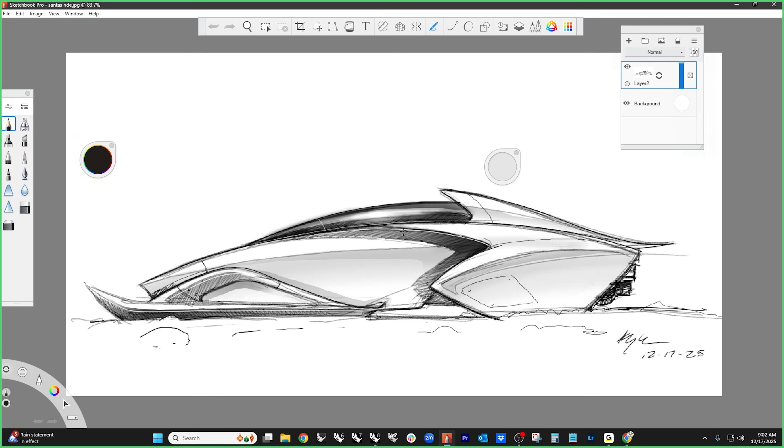The idea behind this is I want to simulate what happens when somebody walks into your desk, throws a sketch down and says build this, and you've never seen it before. You don't have any ideas, you have to figure it out and find the way along the way. So for this thing, I want to talk a little bit about the strategy behind how I would approach something like this. And if my time is limited, which we are on this as well, right?

I'm going to go to SubD because SubD is by far the fastest way to try and pull off some kind of ridiculous form like this.

And if we look at this, break it down into its individual bits, we can look at this form right here and say this has a shape, something like this. It's got a feature line here, which if we were to look at this in side view, I would imagine it would have a shape like this, right? So we can say this is a 3-patch face right here, and this is a 3-patch face right here. Then this transition is either going to be a crease or a 3-edge transition through here, okay? So that shape is actually going to be fairly easy to pull off.

Once we pull that off, you can see that this face right here, and maybe this one too, maybe we'll have to include that one, lines up right in here. So these guys kind of go together. And because this is going to have some kind of arcing section through it like that, we're going to have a face through the middle.

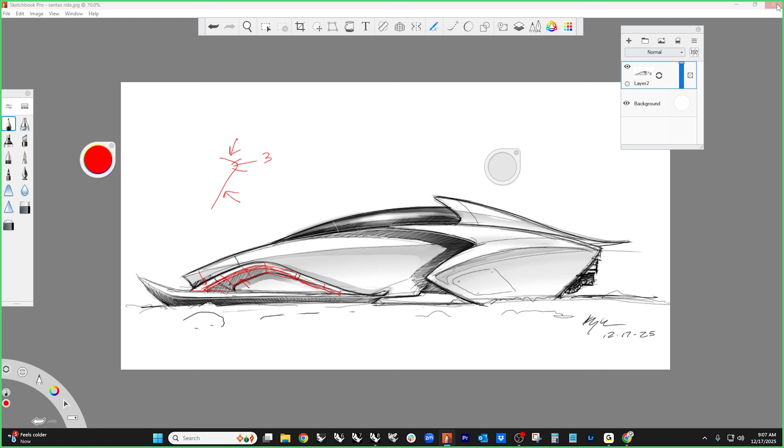And the reason that we need 3 edges is the same reason that we need 3 points to make a curve in CV. I talk about this all the time. If you've seen any of my videos in the past, you know rule of 3. And the idea behind rule of 3, if you haven't seen that video, there is a rule of 3 video on our YouTube. You should watch it.

It takes 3 points to make a corner, right? And if we take this point and we move it out, we take this one and move it out, the corner gets softer. If we move it closer, the corner gets tighter.

And so anytime we have a transition, we're going to make a 3-edge, in SubD, it's going to be a 3-edge or a 3-face transition. This is not how we make corners. We don't do this, right? There's no reason for that when all you need is this.

And so we're going to try and break this down in a way that is as simple as could possibly be. So with that out of the way, and I'm stalling because I'm trying to figure out how to build this. I'm standing here talking about it, so I keep waving my hands thinking, okay, I'll figure this out as I'm going. But that's kind of how this is going to go.

So let's take this image. Let's pick the picture. We're going to go to the materials. We're going to go down here to the object transparency, and we're going to just fade this out a little bit.

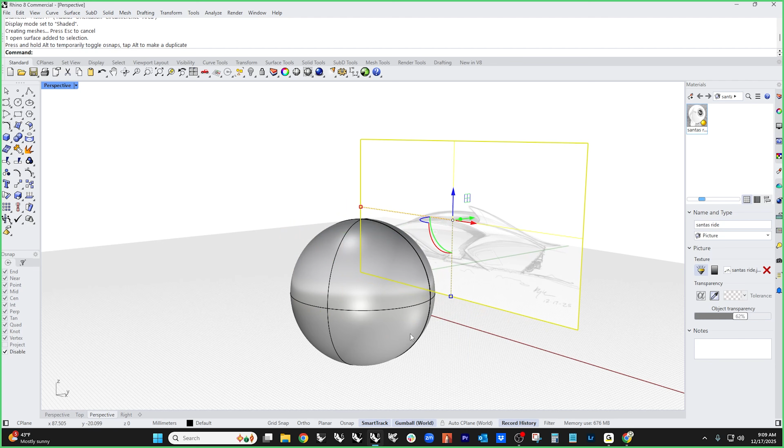The next thing I'm going to do is take this and slide it out of the modeling window. The reason I'm going to do that is if I were to leave this here and then go to shaded mode, it obscures the drawing, and I can't see it. So I like to move it out of the modeling window so I can see what's going on. In this view, it's still kind of targeted to where it is.

Now, because this is going to be a 3D printed thing, let's decide on some type of scale. Everybody always flames me for scale, so let's call this like 250 millimeters, and let's just set a basic scale for this thing, and scale this from here to there. And now we know the basic scale. If I were to throw a dimension on this, we're somewhere in the 250 range, okay?

And for all of those of you who've teased me in the past about using imperial measurements, I'm using millimeters, so don't make fun of me if I have to do math live. I went to art school.

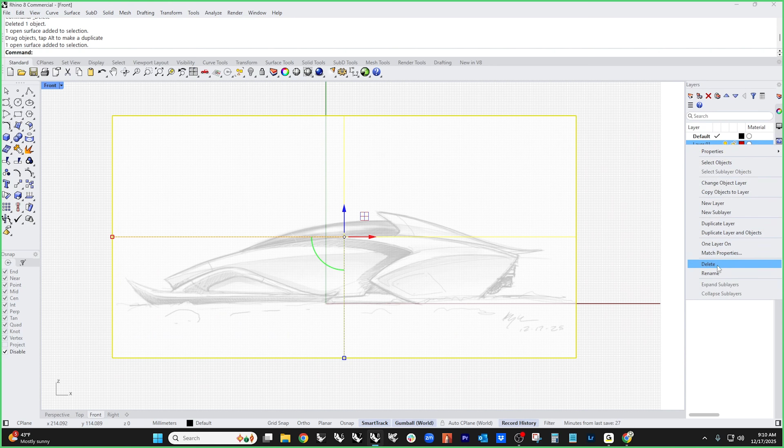Be nice to me. All right, so let's get going on this, and let's lock it. The first thing I'm going to do is go here to the layers. I'm going to assign this to a different layer, and then lock that thing. So now it's in the modeling window, and we don't have to mess with it. Let's tackle the easy stuff to start with, and I feel like the easiest thing to tackle is probably the ski.

So let's start with a curve. I'm going to make this a SubD friendly curve, and I'm going to just draw a shape in here like this. Let's adjust it to match our drawing a little closer. I typically paper doll this stuff, meaning I grab the single face tool. But in this case, I like this ability: once you draw a SubD friendly curve, if you extrude it, you get your face structure for free. So it's a quick thing to do.

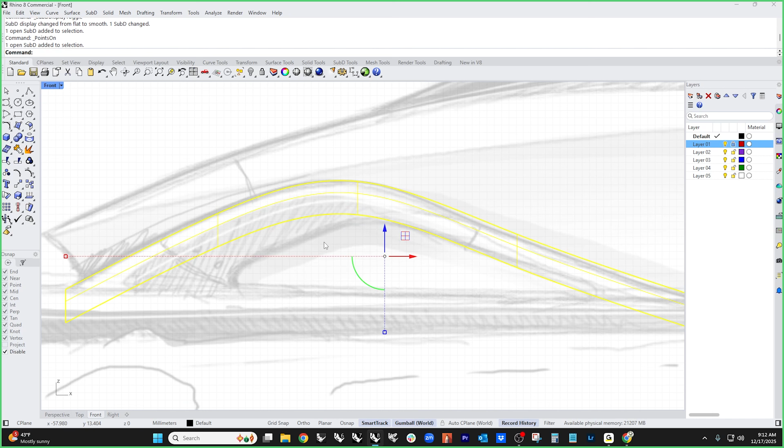So now I can take this edge and extrude this down again. And then if we go to wireframe and box mode, we can start messing with this. Actually, let's do it in smooth mode. Why not? I always say do it in box mode, but let's try it in smooth mode and see what happens. That's interesting. We'll go to box mode. We'll do it that way.

So let's just pull this over here. Pull that up a little bit. Pull this in a little bit. I'm Control-Shift dragging to get those points selected. And if we switch back to smooth mode, we should have our basic shape. And we do. Now, I've got my bone line here, right? This is where my transition is, but I don't actually have a transition yet.

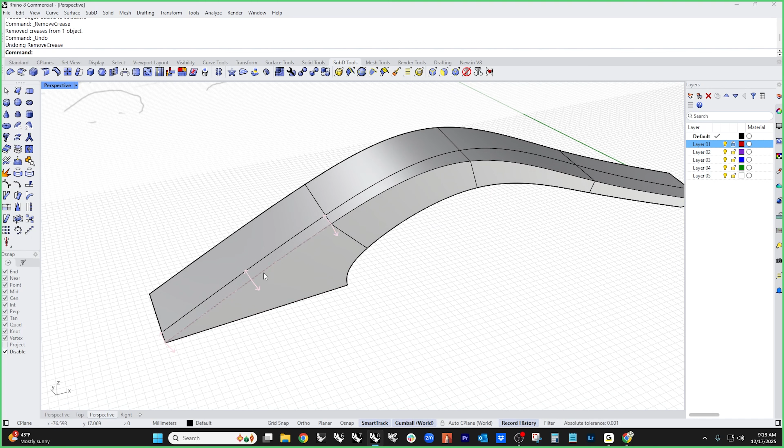If I were to grab this, you can see that the transition is going to be too soft. Or it's too sharp, actually. At this point, it's a crease. If we remove this crease, now it's going to get too soft. So in order to tighten that up, I'm going to just bevel this crease. I'm going to do that in box mode because it's easier to control. We're going to just add a little bevel in here, like that.

And now I'm going to remove my creases. Now we've got a little bit better of a shape. I didn't want to pull it over quite that far. Maybe we grab this one. We can mess with that transition a little bit. And then I want to crease that point.

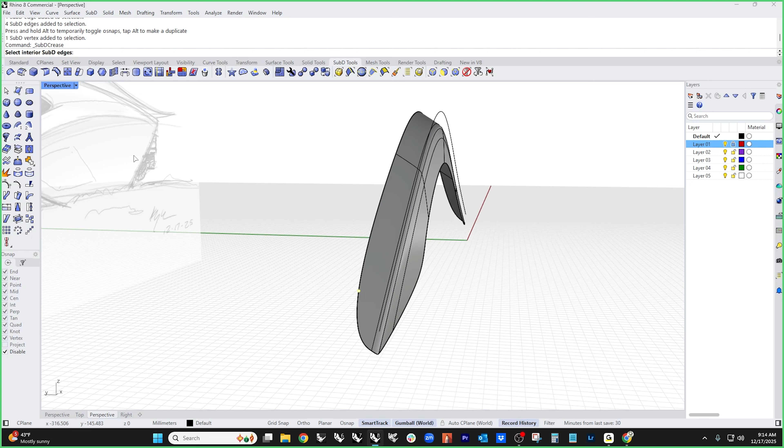Okay. Here we go. I'm probably going to crease these two points as well. Somewhere in there. There you are. And that gives me my ski shape. Okay. So let's finish that off, and let's just grab this edge right here and this edge.

Let's just extrude that out one. And then let's grab this edge. Actually, we can just do this whole thing. Deselect those.

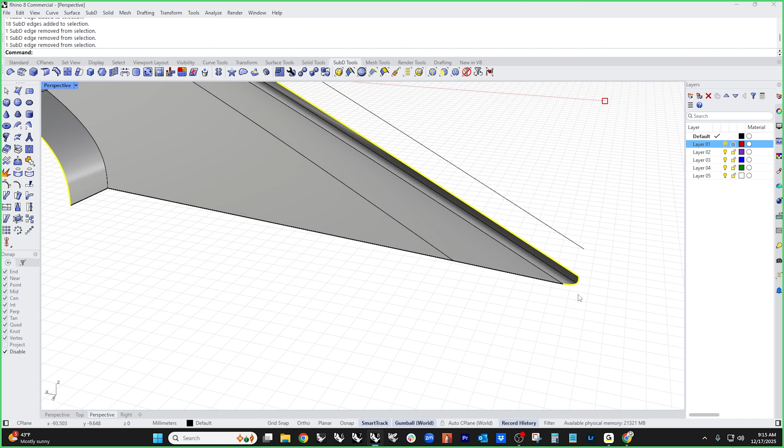And let's bridge those. Or not. 1, 2, 3, 4. There we go. Bridge has to have matching edges. And bridge is also fussy about the picks, so we have to follow the directions pretty closely.

So we're going to set the first edge. Now this is going to be the second edge. And that'll bridge that together. And as far as segments go, I'm pretty okay with just one on there.

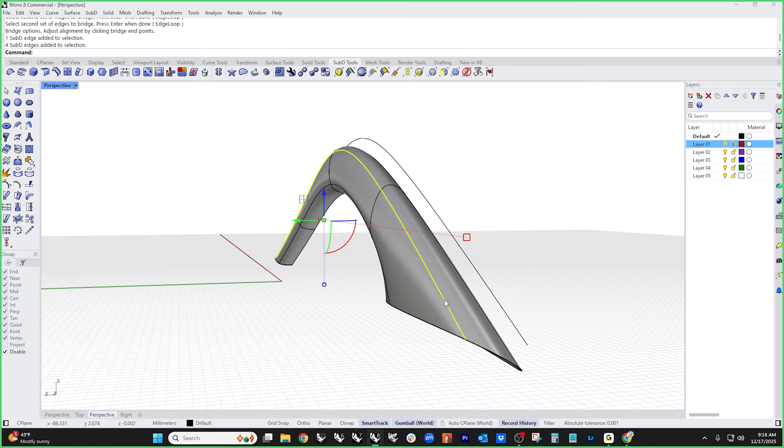And then let's add a bevel to this. And we're just going to add our little 3-edge set there. And we'll add a little 3-edge set here. And then that's going to give us the sharpness we need on those corners. All right, probably bevel that edge as well.

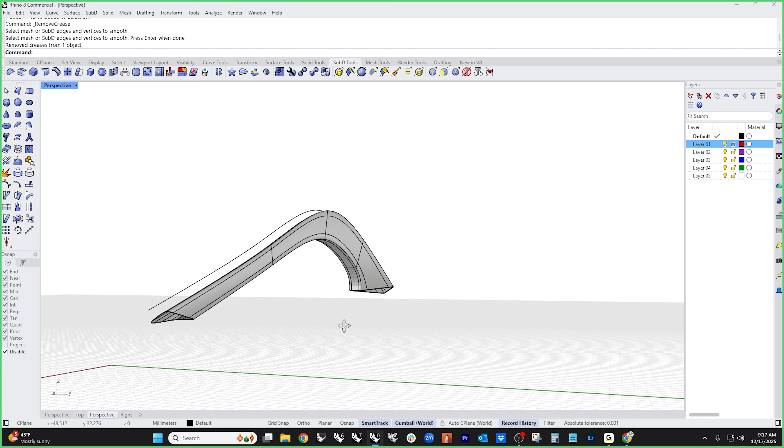And then we should be able to get rid of all of our creases. I like using bevels over creases because they're a little bit easier to control. And that gives us the ability to adjust this edge as finely as we want to do it. So, all right, there's our first part of our ski.

Let's do the second part of the ski. We'll do the same thing down here. SubD friendly curve. Like that. And I'm just going to extrude those faces down. Go to box mode. Go to wireframe so I can see my sketch.

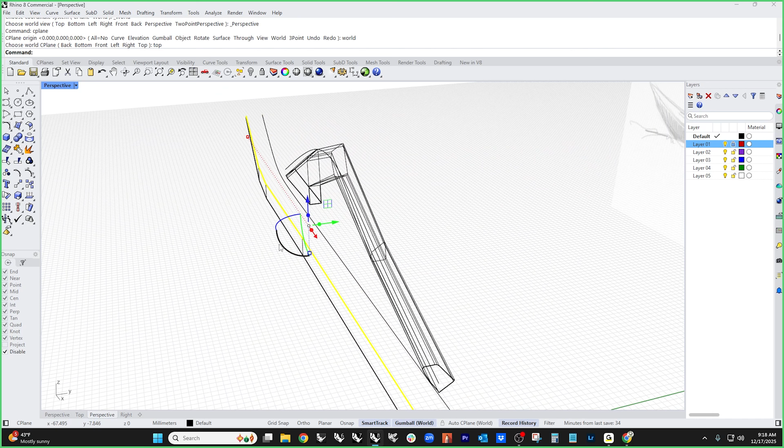And I'm just going to tighten this up a little bit. Tighten that up a little bit. Let's move this out, kind of like that. And then the ski has a second part up here that kind of transitions in. It's just 1, 2, 3, right? We're just 1, 2, 3ing our way to where we need to be.

And so let's pull this in a little bit like that. And at this point, if we were to look at this, this is our 1, 2, 3. So if we go to smooth mode, it's got creases. Let's get rid of the creases. If we go to smooth mode without creases, you can see that that's a very, very soft transition.

So what we need to do is this needs to be 1, this needs to be 1, but this edge actually needs to be 3 in order to get this effect. So right now what we have is this. Very soft, right? 1, 2, 3. What we need is this. Right? So we need a 1, 2, 3 right there.

So what we're going to do is bevel this edge. And we're going to bevel it just a little bit. Now, people get bent out of shape because bevel does some wonky things sometimes. Just get the bevel in, because you can always pick an edge and slide it and adjust this later.

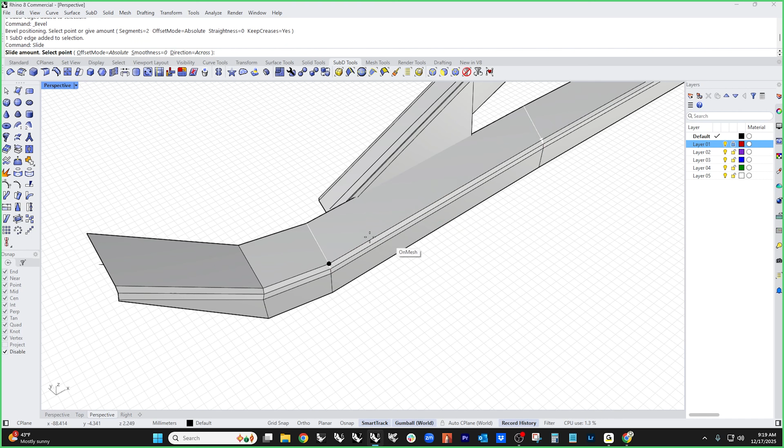So don't get too worked up over whether or not bevel is doing anything. Sometimes bevel gets a little wild on you. Don't let that throw you. Just keep cruising and then adjust the edges and stuff later.

I'm going to cheat, and let's just mirror this, and then we're going to join these two and we're going to make them smooth. And that gives us this. And let's move this guy over, something like that. Maybe this edge down here needs to pull down a little farther, so I'm just going to extrude another set. And then that all intersects there.

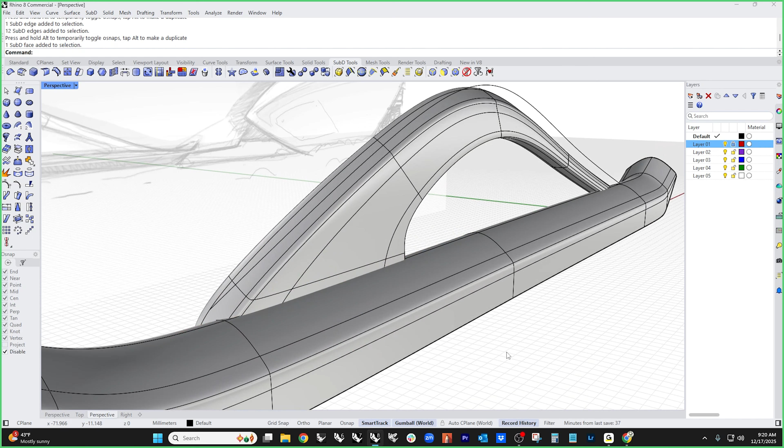Now, we could spend the time to bridge these two together and have really smooth transitions. But like I said, we're going to move fast and kind of smash stuff. So I'm not super concerned about whether this stuff is intersecting. It just needs to be overlapping, right? So this is overlapping completely and that's overlapping completely, because when we run Shrinkwrap on this, Shrinkwrap is going to do the unification for us. So let's bridge these guys together.

And one of the little subtleties of bridge is if you pick edges that do match, you can pre-select them and run bridge. If they don't match, then that's when bridge starts misbehaving and fussing at you.

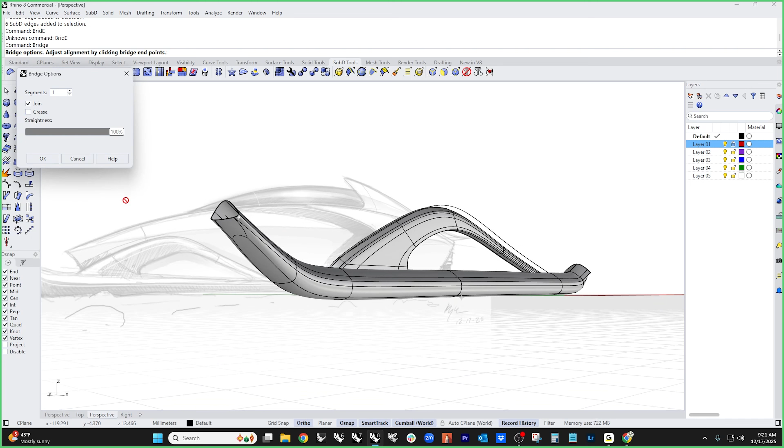So we can crease it and make it sharp on the bottom. I'm probably not going to worry about that. I'm going to leave it. Actually, maybe. We'll leave it like that. We'll leave it soft. And then we can always bevel this edge.

I don't like this topology down here, so I'm going to actually just stitch those two using the stitch command. That gives me an edge down here so that if I were to bevel this, it's going to go more in the direction that I wanted. And like I said, bevel gets a little wild sometimes, so don't worry a lot about it. You can always go back and adjust later. I just get the edges in there and then you can adjust them later.

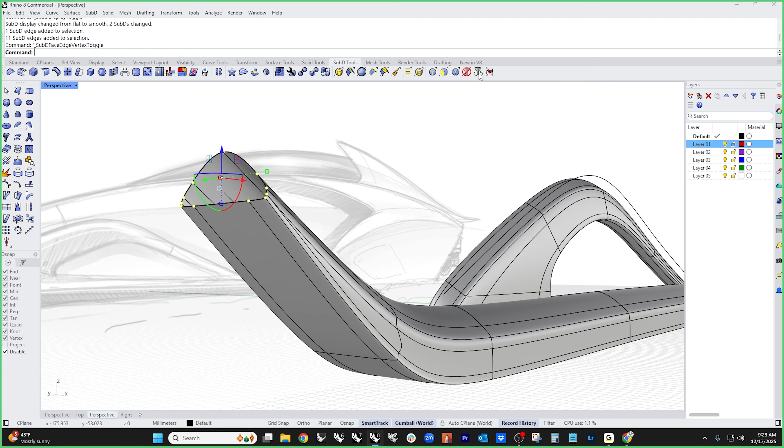And so now if we go to smooth mode, that gives us this. And then let's grab this entire edge. Let's see what happens. Let's use the filter to toggle this to points, and then let's stitch that and just see what it looks like. I'm okay with that, because we can always grab this edge, slide it a little bit. That gives us a nice little point. Again, we're kind of moving fast here, so I'm not gonna spend a lot of time sweating this stuff. I'm just gonna kind of keep pushing forward.

Now, it looks like our transition here is a little sharper than what I have, so I'm going to actually add an edge right there and let that transition happen a little softer. And then let's look at the shape of this and decide if we like it. And in this case, I kind of don't. I kind of want this to be a little cooler shape. So let's play with it now. Maybe we pull this in and give it a little bit more interesting profile like that.

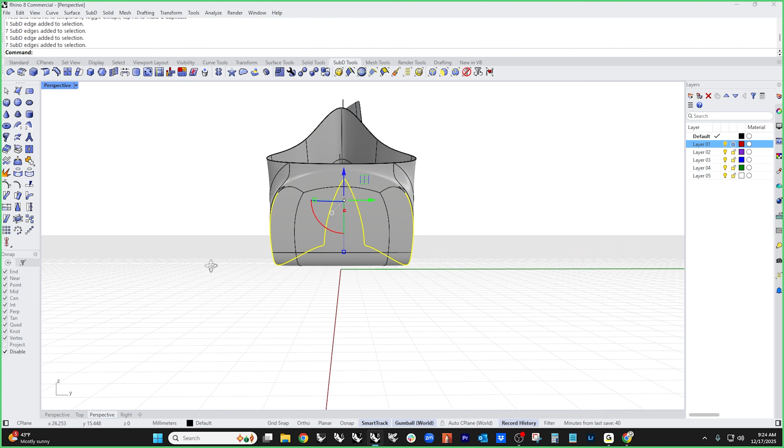And then maybe even this edge and this edge come in. Got a little weird topology back here. We'll deal with that. Maybe we pull this in just a hair. And then maybe even this one could be a little bit more interesting. Maybe just these center sections. This is the beauty of SubD. It's playful. You can come in and start playing with things and get very interesting shapes, and start kind of having some fun with it.

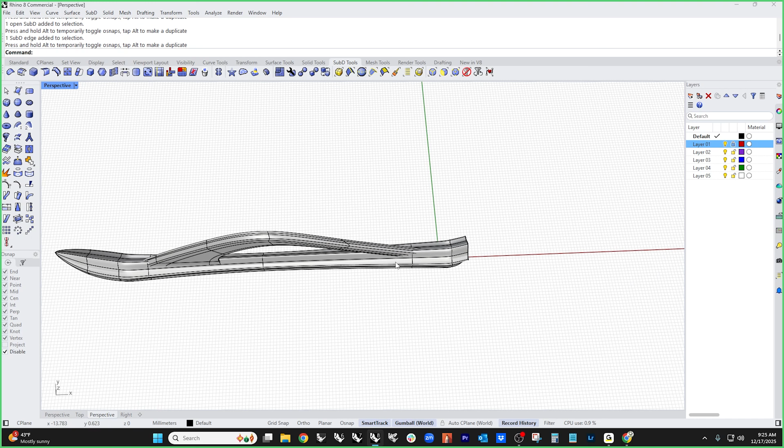Add a little bit of shape to that, and then skis are not typically dead flat end to end unless you grew up in the 70s like I did. So let's add a little shape to it like that. And then I don't like the relationship between these two anymore, so I'm going to move this over just a little bit. And this one, I don't like how that's coming together, so let's pull that back a little bit. Like that.

Now, like I said, there's a couple of options as far as the transition between this piece and this piece. We could actually go through and do the topology in order to be able to connect these all up so it's a beautiful, sweet transition. I'm not going to do that for this. What we're going to do is simply just shrink wrap over this. The other option is if we went to NURBS, you could do what I refer to as a pipe trim, which is you trim a gap out of this one, trim a gap out of that one, and then use blend surf in between the two. I do that all the time when I don't want to mess with the topology on SubD.

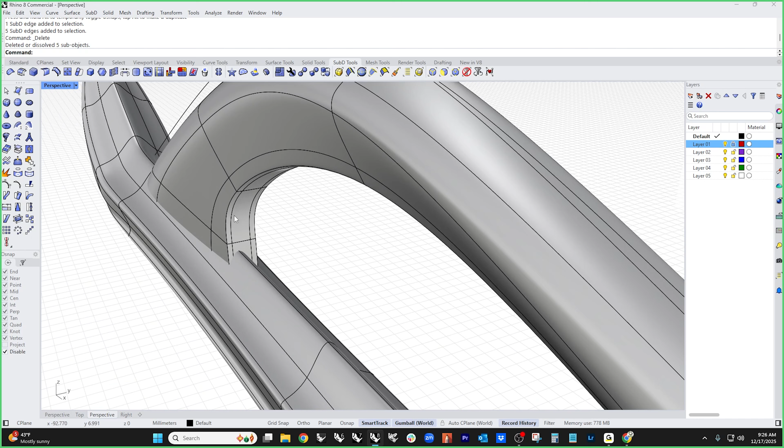I will grab the blend surf tool and just blend surf this stuff together. And that's a super easy way to handle that. Now I'm messing with the topology a little bit. This transition was a little sharp, so I didn't really like that. This transition is a little sharp. I don't like that. So I'm going to soften that up just a little bit just by getting rid of the center of that. And this one actually is a little sharp, so I'm going to get rid of that one. And that softens that up a little bit, makes it a little bit more elegant.

Let's slide these guys in a little bit. I feel like I want to roll that highlight off of this edge just a hair more. So let's pull that out.

Spent the first part of the video talking about how we're going to move fast and not really worry about stuff, and then here I am doodling. So, yeah, what are you going to do?

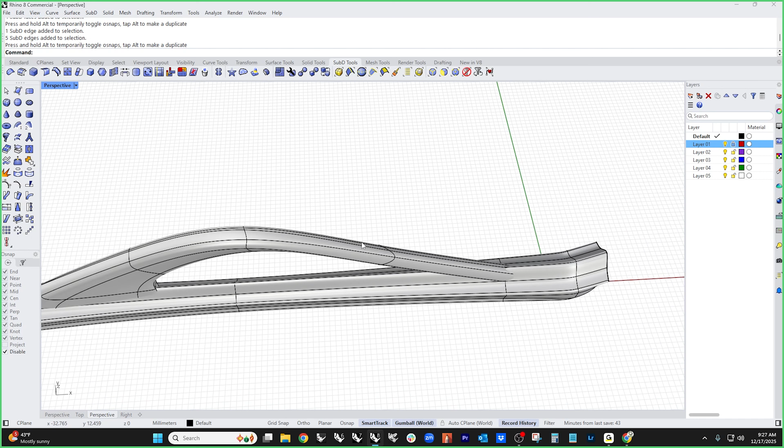I'm going to take this end of this thing. I want to skinny it just a little bit so that there's a little bit more thick-thin going on there, and then I'm going to fatten this end just a little bit. I like that kind of teardrop thing that's going on there a little bit better. Maybe this edge got a little fat on me. That feels a little nicer.

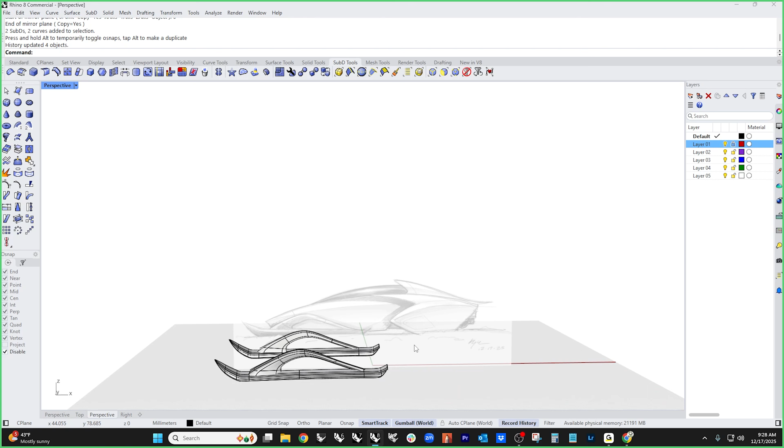All right, so let's call that skis. I'm going to group those for the time being, and let's move this out to where we think our track should be, something like that. And then I'm going to mirror. And that's our setup. Now, we may need to mess with that. We might need to move this out a little bit farther. But that's the basics of that. Okay, so now we got skis. And the back of this is ugly. Let's fix those. Let's grab this.

And I'm going to use the filter to change that to points, and then I'm just going to stitch. Now, the topology on this is not something that I'm terribly proud of. So let's mess with this a little bit and see if we can take some of the awful out of this. Let's take these guys and these guys. Let's stitch those together. I basically wanted this just to come to a singularity at the back. Stitch that up.

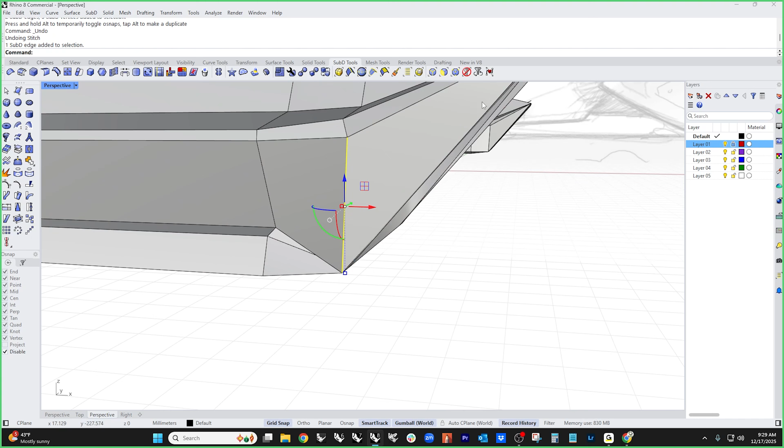And that edge, let's get those points on, shut that one off. Good enough for shrink wrap. That'll work. Still some mank in here that's not amazing. You know, this edge could probably go away, and this edge could probably go away. But for what we're doing, it's going to work just fine.

Okay, so let's look at the next biggest part of this thing, like the main body form. I'm going to stick these on a layer and change object layer, and I'm going to lock them. And I'm going to not make them purple because I don't like all the candy colors. And then that way we can hide these things if we need to. So let's hide them for the time being. And then let's look at the layout of the body.

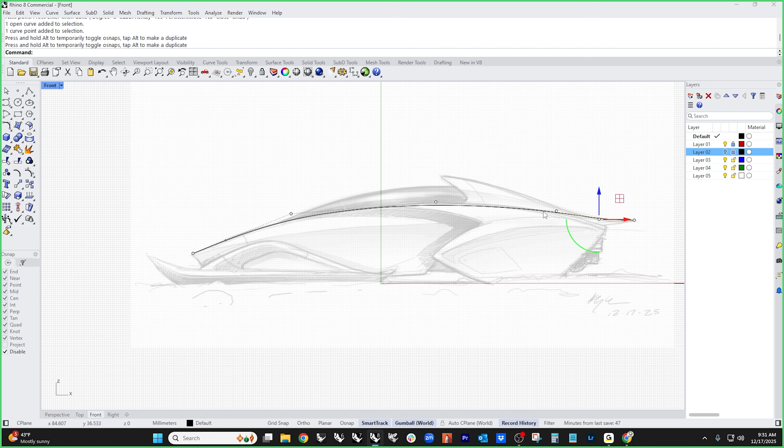Now, the main form on this I'm going to start with is kind of the profile shape here. So let's go ahead and draw that. Again, SubD friendly curve. And we're going to just draw our shape. Looks like I've got grid snap on. And then it's got a little ducktail in the back, so that little transition back there. And that's good enough. So let's just extrude this down. That's going to give us a row of points.

Go to box mode and start getting what we need here. Filter on or something. Interesting. I just updated Rhino right before this video, and I'm wondering if somebody messed with something on the selector. It's behaving a little weird. All right, so that gives us this first little strip right here.

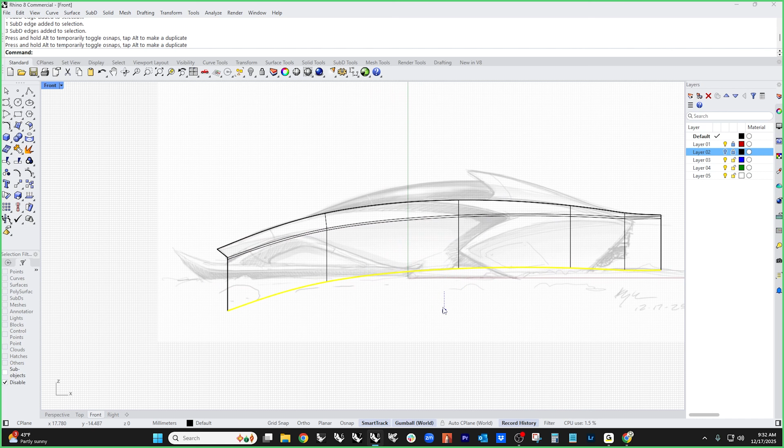We need another set of edges here, so I'm going to just extrude down one, and then I'm going to extrude down again, and then I'm just going to scale to 0 to flatten these guys out, and then we'll pull this up. And so now we can just grab this guy. I'm going to relocate gumball to here. I'm going to rotate gumball to there, and then I'm going to scale this edge flat. Relocate gumball there.

And then scale this a little bit. And that gives us kind of our front end. And maybe we'll tuck these in a little bit just to give it a little shark mouth. And then the back of this, actually these edges right here come way up like that. And this edge is going to come way forward like that.

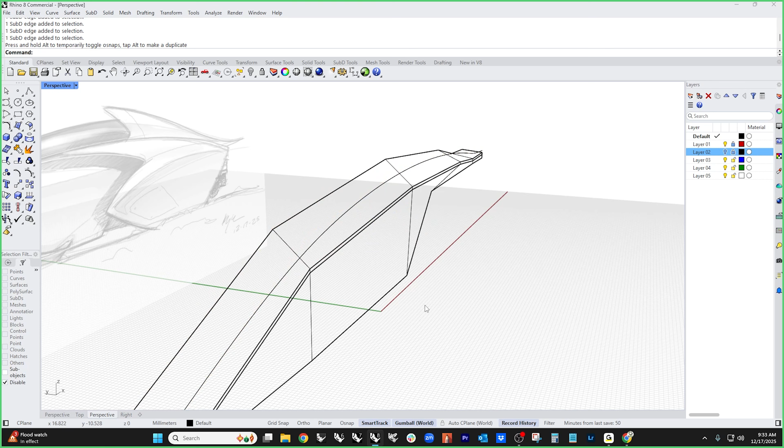And then this top edge is going to break over to start creating our shape like that. And then this bottom edge is also going to break over to get our kind of tuck under. Now, if we go to smooth mode, we should have something that looks like this, and we're going to get rid of these creases. And that should give us something that looks like that.

Now, we can start picking edges and slide them to get a little softer result. See how that, remember, this looks familiar, right? We're moving points farther apart and they get softer. We move them closer together and they get tighter, right? So if I grab this point and I slide it, see how that sharpens up? If I move it away, it softens.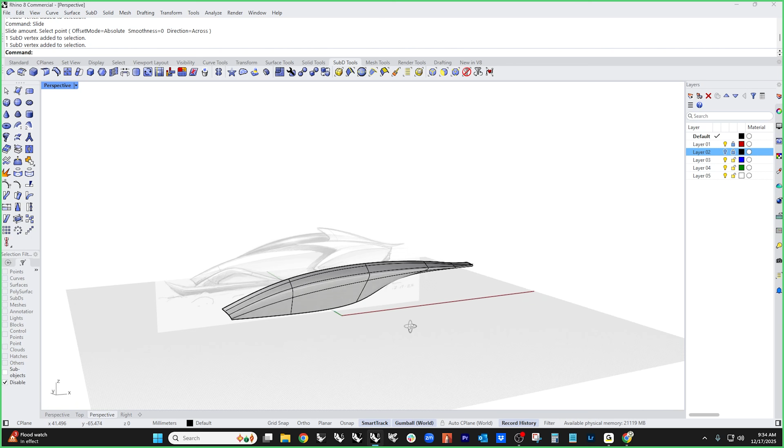It's just threes. 1, 2, 3. That's what's making this up. 1, 2, 3 is what's making up this part of the transition. 1, 2, 3 is what's making up that part of the transition. Once you understand that 1, 2, 3 thing with SubD, all of the mystery falls away.

All right, so let's mess with the shape of this now, and we can do that by just adjusting this, right? And I'm going to hide this curve. Actually, I'm going to delete it because we don't need it anymore. And then if I mirror this by here, and then we take these two things and we join them smooth, we get the basic body of our

vehicle. And we can crease these points down here to get that little sharp edge right there. And maybe we want to pull these 2 points out. Starting to look kind of interesting now, right?

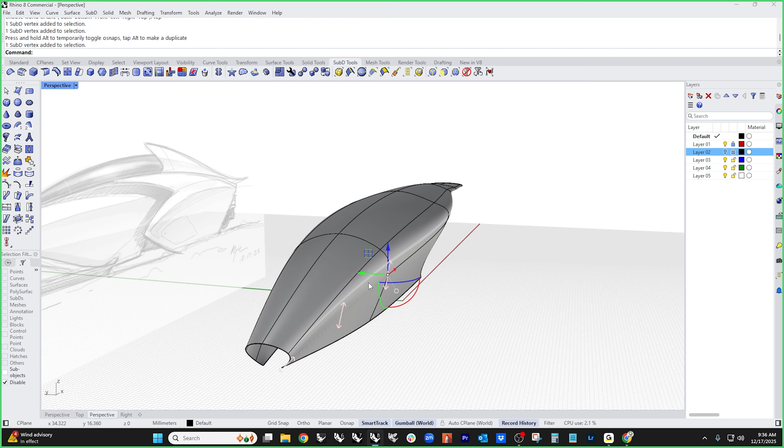Kind of like a speed carp. That was a big insult when I was in car school. It's good, looks like a fish, like a speed carp. And fight.

All right, so let's get this back where it needs to be. And that's kind of feeling... I'm going to slide this point back down a little bit. I want that highlight to tighten up a little bit.

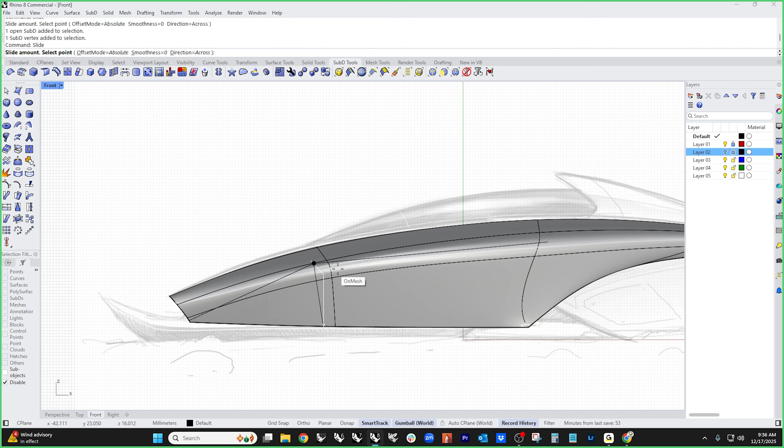And I'm only messing with one side of this. I could have this set to some kind of symmetry, but I'm not going to worry a ton about it. I can always go back and do it again. So I like this side, I don't like the other side.

So let's just blow it away and we'll just mirror again. There is a symmetry command in SubD, and everybody's like, how come you don't use the symmetry command? I'm like, A, because I'm lazy. And B, I do actually kind of like to experiment with the form and see what works. So let's close this off.

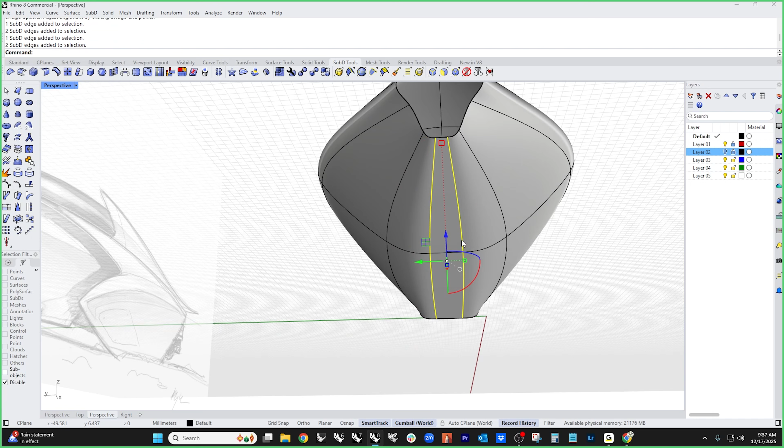And let's bridge this. And I'm going to add a couple more segments in here, maybe like that. And then what that'll do is gives me the ability to adjust the shape on the bottom of this thing, how tight that transition is. Like maybe we add some kind of crazy ground effect thing going on there.

Not necessarily indicated in the sketch, but I tend to, especially when I'm modeling my own stuff, take the sketch as just a suggestion and then figure out what I really want the thing to look like in 3D. Because you can't lie in 3D, right? You can lie, cheat, and steal on a sketch. That's like, anybody can do that.

You know, I see people generating stuff with AI all the time, and I'm actually pro AI. That's a controversial thing, but there is a lot of lying, cheating, and stealing going on there, where once you get over the novelty of the thing, there is some practicality that has to happen at some point where you say, okay, well, now this thing actually has to be a real thing. And that's where getting something into 3D really makes a big difference.

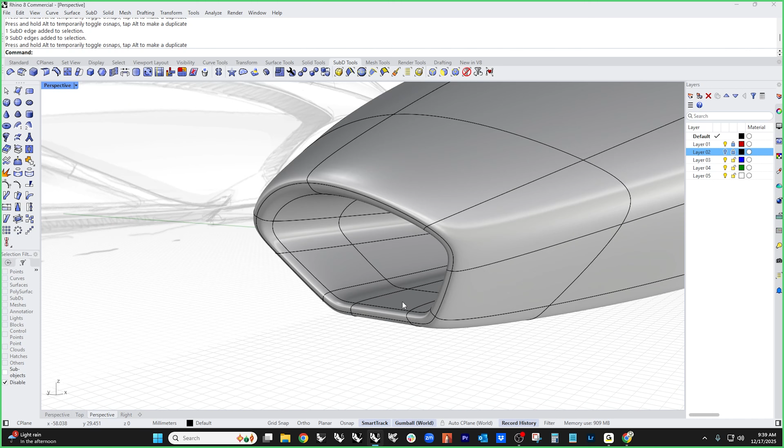So while I was talking, what I did was I selected this edge and I just started scaling, held down Shift, held down the Control key, and that extrudes in another ring of faces. And as I do that, now I can use the extruder on the gumball and just model that intake in. And then just for sight lines and stuff, it probably makes sense to just take this and tuck it up like that, so when you look in there, you don't see the opening.

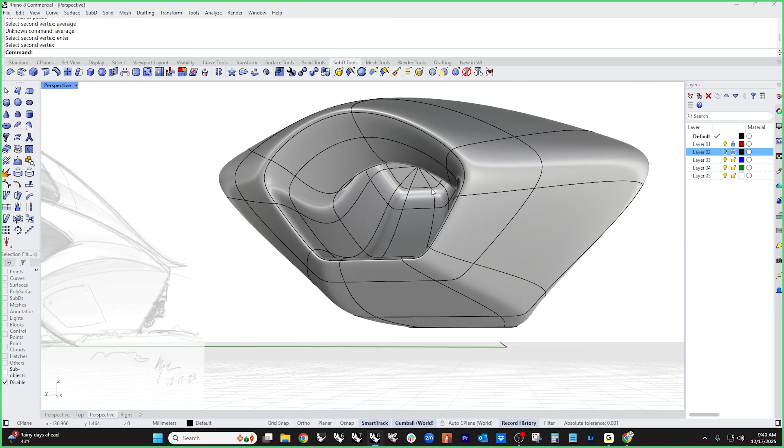And I would probably even take this, because of what we're going to do with it later, I'd probably just take that and stitch it into a singularity and leave it alone so that it's closed. And I may need to add one more edge in there so that it doesn't get a little weird. Or I can even do what I did before, which is to select this, start scaling, hold down Shift, hold down Control, and scale in a cap, and then turn that to points, and then stitch that. And that makes a little cleaner thing like that. So this is now closed up in the front.

And then let's bridge the back of this together. And I probably will use the same settings I did before, that way everything lines up. And then I can stitch these two, and I can stitch these two. And then that way the topology all flows the way that it's supposed to flow.

And then I can always go back if I want to start adding details. I can say, well, does this have a little secondary canard or something like that on the bottom that makes something interesting, which that's kind of cool. I don't hate that. Let's play with that a little bit and see what we get. That's kind of a fun little highlight.

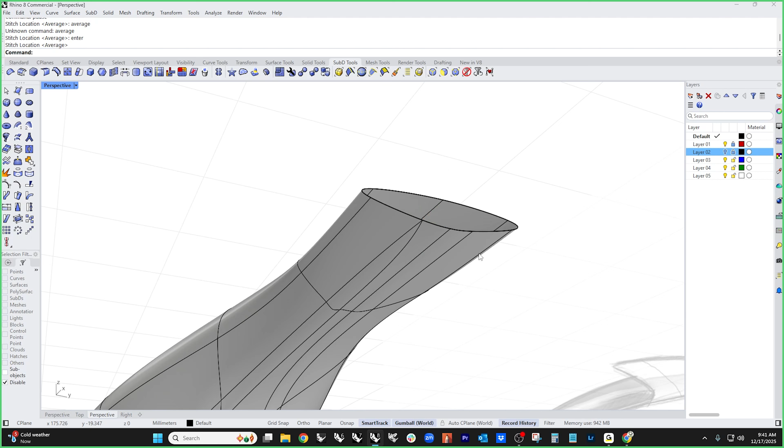So this guy's closed up, and then back here we have a decision to make about how we want to close this thing up, because we don't have the same number of edges. I've got 2 edges up here, and 1, 2, 3, 4, 5 down here. I need to figure out how to combine this stuff. So if I take these two and stitch them into a triangle, and these two into a triangle, now I've got 1, 2, 3 edges. Still isn't going to work.

So what if I take these two and stitch those into a triangle? Now I can bridge between those two, and it ends up working.

Now, the edge of this ended up failing because we've got some stuff going on here. So I'm just going to stitch that corner and that corner, and then go back and crease those to get my sharpness back, and then take this and tuck it up a little bit so it gives me the shape I'm looking for.

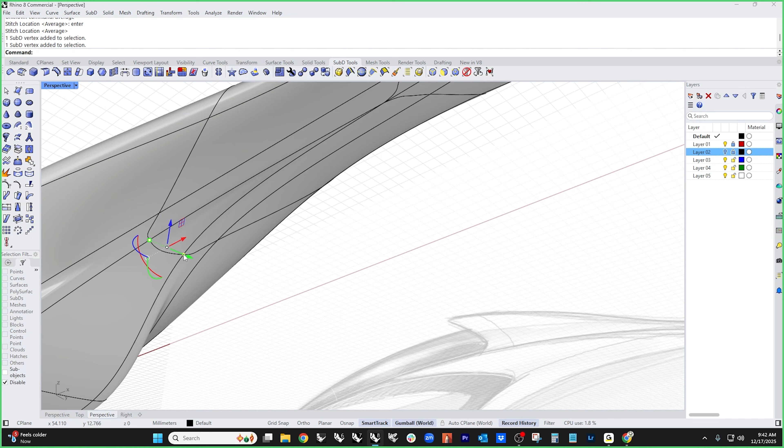We may even want to start combining these a little farther down, like maybe these two stitch, and that way the topology fights itself a little less. Maybe we stitch these earlier and let that do something like that. Yeah, it'll work, that's fine. We could mess with this a little more, but I'm not gonna. It's kind of doing what we want it to do.

Let's do something here as far as evaluation is concerned. Let's throw the automotive environment in here because it's got a really nice horizon line on it. I'm just grabbing that from the Rhino environment library. And then if we go into rendered mode, we should probably make it red because it's our Santa.

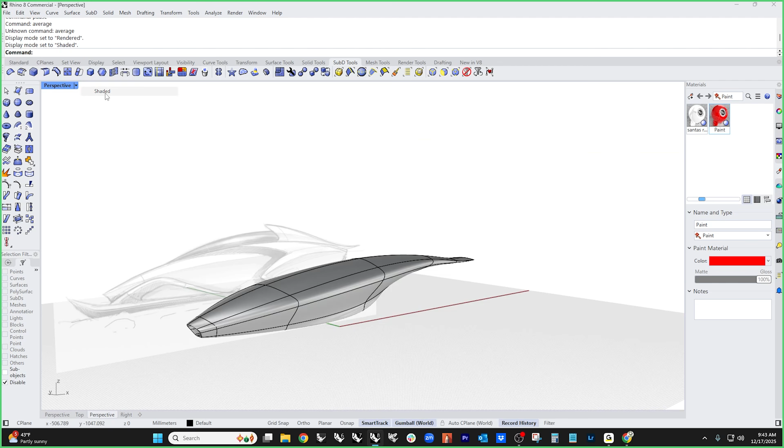So now we can start checking highlights and start with the oohing and the aahing, saying okay, well, that's doing what I want it to do, right? Okay, how we doing? Need to pick up the pace a little.

All right, so let's bring our skis back. I may have been a tad ambitious with this build. And it looks like our model is actually not at 0. So let's fix that.

And then the skis kind of need to attach to the sled somehow. So I'm gonna unlock that, grab a face here, and extrude, and then grab. Somebody has messed with the selector.

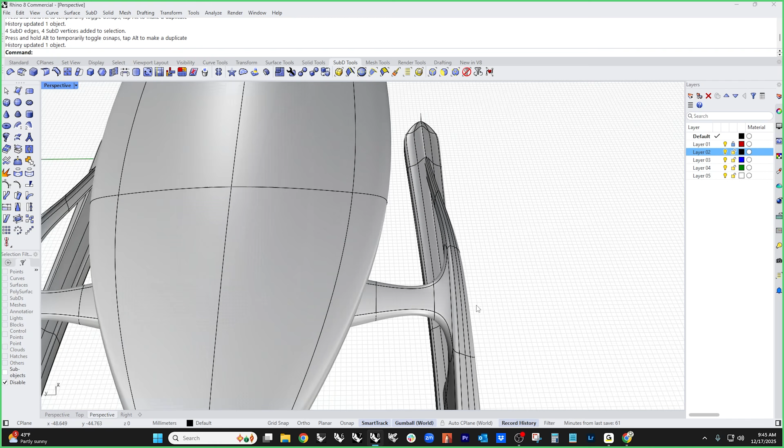And I'm going to just draw some kind of fantastical suspension component in here, and we'll call that something interesting and just leave it be. That'll be enough. Maybe we play with the shape on this. Does it look cooler like that? Does it look cooler like that? I kind of tend to like something like that. Looks a little swoopier. So let's call that good.

Now we've got this form on the back. It's kind of an interesting one because it integrates in with the body. And again, because of how we're going to handle this at the end—and it looks like I lost my corner here—because of how it integrates with the body, I'm not going to worry too much about any of this. So let's hide this for now.

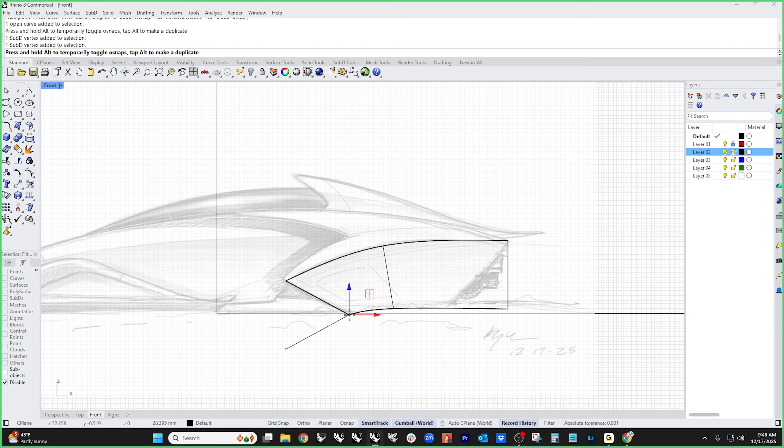Let's go back to our curve drawing technique. And this one we're going to do really simple. This is just going to be a 3-face thing. And we might need one edge in the middle just because this needs some shape. So let's do that. I'm going to insert an edge in the middle, and then we'll just add some shape to that.

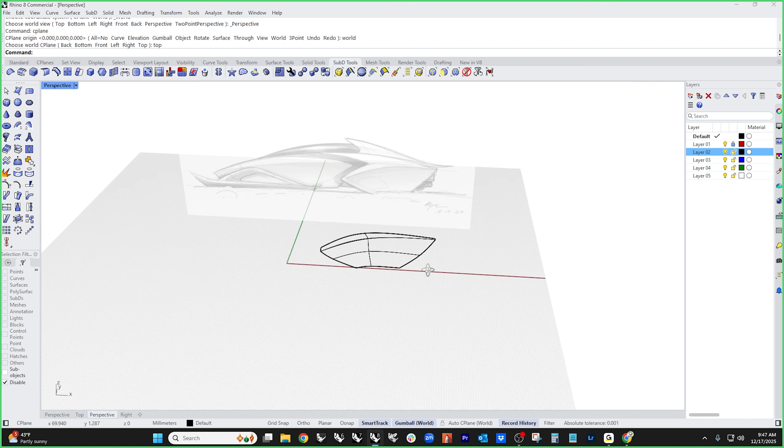And then this edge up here, we're just going to extrude that straight up. Control Shift Drag is how I'm getting the additional—how I'm selecting the sub objects of this thing, if you're like, how in the world? And so we've got a flat piece now, right?

This is what I refer to as a paper doll. And if I pull this over, that's that transition. And if I pull this over, that's that transition. And this is creased right now, which I don't want, so I'm going to uncrease it, but I am going to bevel it. Bevels are a lot easier to do in box mode, by the way. And so that gives me that transition.

And then I can mess with this transition. Come now, I'm going to have words with the developers—they've messed with my selector.

So that gives us that shape. And then this edge right here controls how much bend or flex this thing has. And then this edge controls how sharp that highlight is.

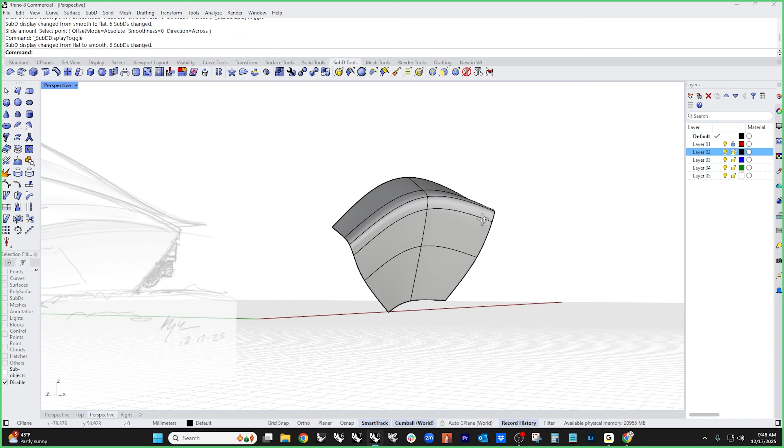So if I bring this up tight, that highlight sharpens up quite a bit. And I think that's kind of what I'm looking for. I may get rid of that one just to soften that a little bit. I like that better.

Now if we count, I've got 1, 2 edges here. If I consider that this is the side of my box and this is the top of my box, then I have to get 2 faces over here in order to get this guy to turn the corner. So if I go 1, 2, and then I go to box mode and I stitch that together and stitch this together and get rid of this crease.

Then same thing over here. 1, see that? That lines up. 2, and then I stitch these 2. I have a hotkey set up for stitch, by the way, that's why I'm not hitting the command. I highly recommend you set one up for yourself because you will be using it a lot.

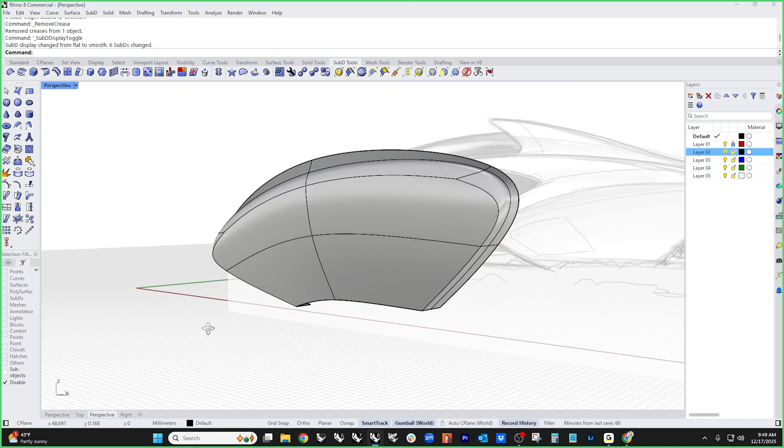So now that gives us this kind of shape. And this edge here probably needs a soft crease because we've lost our sharpness here. So let's throw a soft crease on this. Let's do a constant weight of like 60, and that will give us our sharpness back.

And let's do 70 on this one. That gives us the ability to take this edge and put it right back where we wanted it, and maintain the sharpness of that form without it being laser sharp. There is a crease on that which I want to get rid of, and there's a crease on that which I want to get rid of. That'll soften that thing up a little bit.

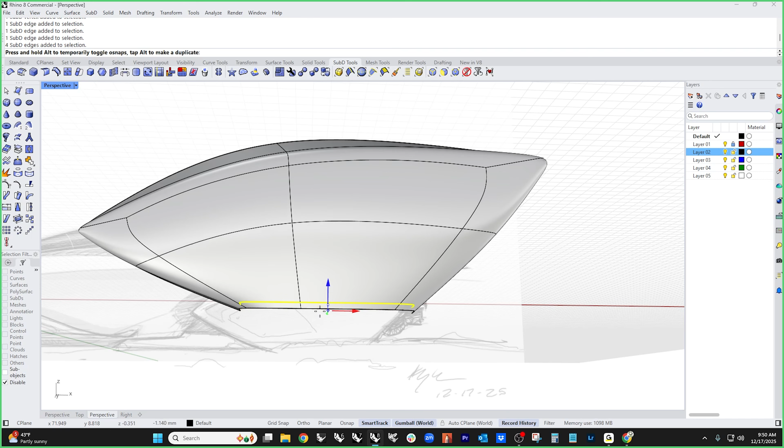So that gives us our little pod, right? And we can say that maybe this is like some sort of ski, skid, skiff, whatever thing. So maybe this is supposed to have a flat bottom. Anytime you're designing anything, even a fantasy thing for some kind of supposed purpose, you should think about what the thing is and whether it makes sense.

Like, does it have the basic feasibility of the machine you're designing? So let's get this and go to box mode, and we're going to extrude these guys over one, and let's stitch that. Stitch that. Screwed up, gotta go two. That one, that one.

Any questions so far? You guys have been quiet. Either boring you or fascinating you. Either way. Come for the boredom, stay for the fascination.

All right, so that is our basic kind of pod shape for the side of this thing. Now we need to worry about this buttress. And I might want to pull this edge. That's okay, I actually may need an edge right here. So maybe what I want to do is actually add another edge right there.

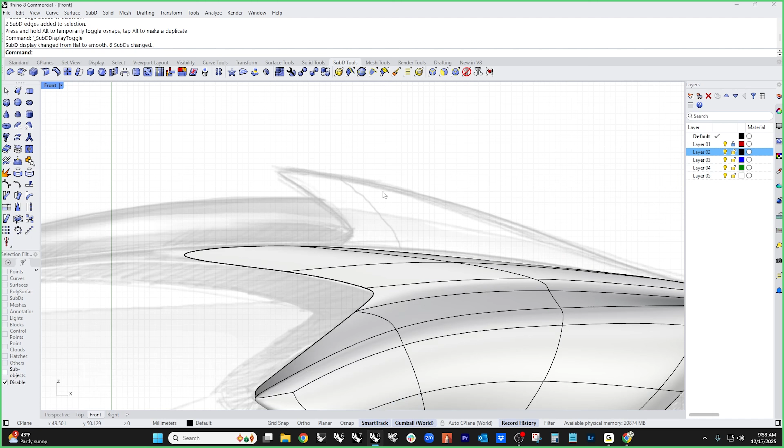And you can see that blade kind of just happens, right? That's kind of fun, and I'm going to hook that back so that it gets that little transition, and when we go to smooth mode, you can see that that just kind of appears. Now it's not in the right position, so let's fix that.

So let's grab this, start pulling that over. Let's bring our body back so we can see where it is. Let's stick that out there like that. And so now we need to just kind of stab this into the body somewhere. And it would make sense for it to kind of align right in here like that.

Although it looks like on our sketch, it's actually a little higher. So let's put it up here. And it looks like our body is a little short compared to our sketch.

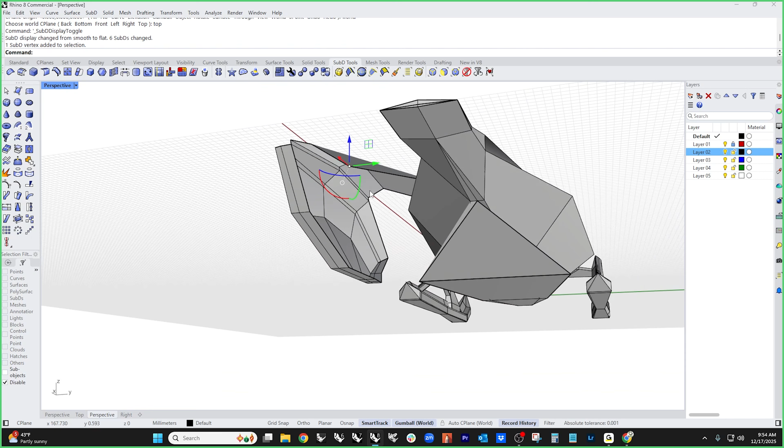Let's pull that over, poke it down a little bit. And you guys don't believe me that this garbage can is going to turn into something good at the end with shrinkwrap, but hang on. That's what I keep telling myself. It's going to work out.

All right, let's get this edge a little cleaner, like that. Let's see what that looks like. That is a little high. Don't like that. Actually, let's see what happens if we delete that. That's fine.

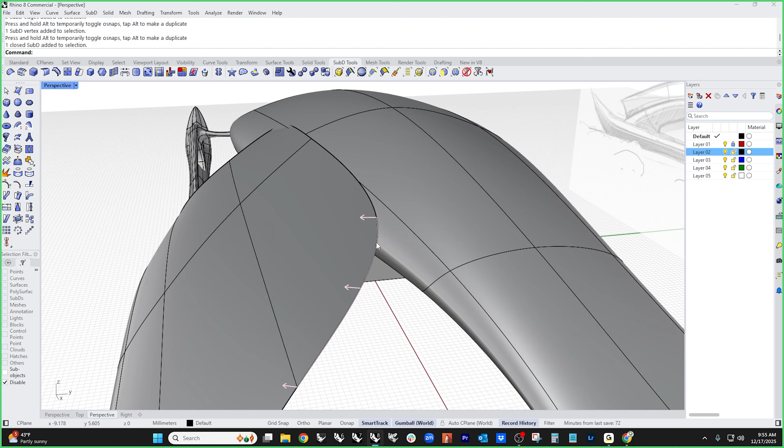So that's starting to do something a little bit more interesting. Let's crease that point. If you crease the points, you get that sharp corner, which is basically what I need. So we're creasing that, and then that gives us that. Let's just tuck that in, and we can play with that transition where that hits.

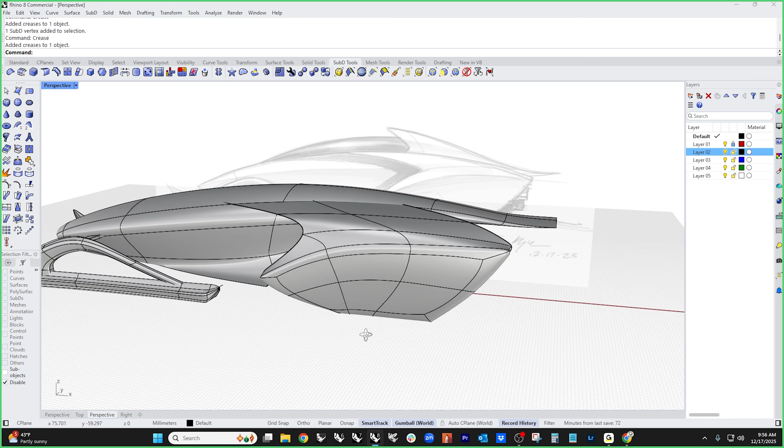We're just looking for where the intersection is. Let's crease that point too, and that one as well. That'll give us a little more of our sharp edges, like that. So we're kind of in the right direction.

I think this is probably high. That probably needs to go back up. Starting to kind of come together. Maybe this edge drops a little bit, so there's a little definition in there.

Let's see what it looks like if we mirror it. Actually, let's look at the top view and see what we got. Let's type top correctly - let's take 10 times to type the word top. All right, let's add a little shape to this. That's a little cooler.

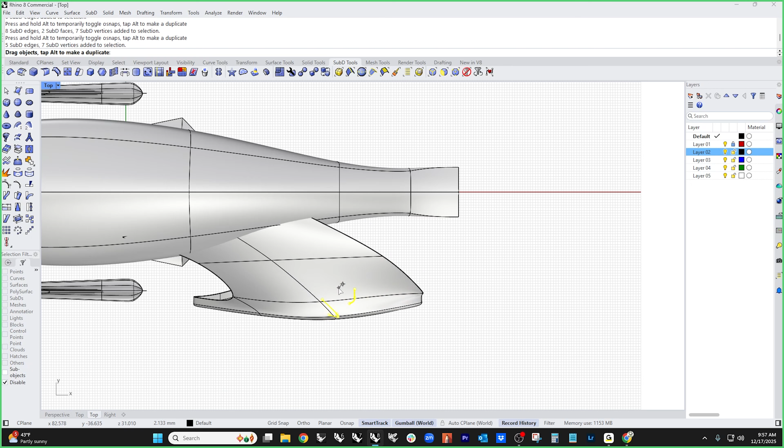Let's look at the box mode. I'm going to isolate this and look at the box mode, just to make sure we haven't made a mess of anything. There's a technique for box mode where you can sight down the isoparam lines, and like on this one, see how this is kind of weird - I don't really like that, so I'm going to straighten that out a little bit.

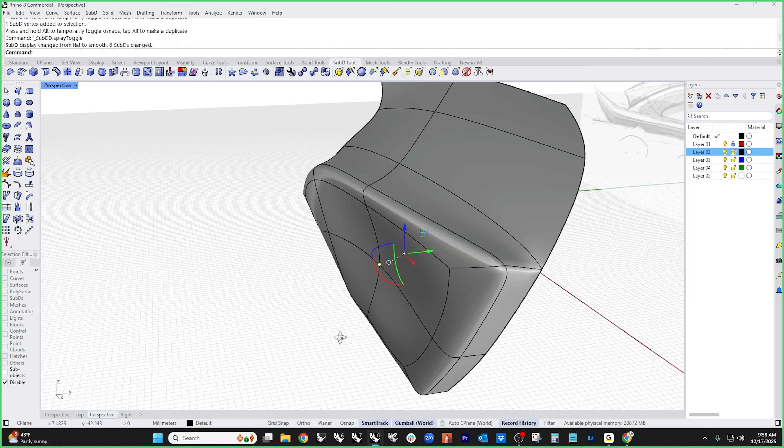And then back here, that one doesn't flow nicely, and this is kind of inverted. You want all of your box mode lines to flow nicely, and when you see one that's really kinked out of alignment, you can go back in and check. Like, for instance, if this one was pushed way in like that, and you couldn't figure out in smooth mode where this weird transition is coming from, go to box mode and look at it, because you can see - well, it makes sense.

This is one of the biggest reasons why you want to keep your models clean. See this? Ooh, messy - let's fix that. All of this stuff should kind of flow in a way that makes sense. It shouldn't be really crazy - you shouldn't have anything massively out of line. And if you do, that's probably where your geometry problems are coming from. See this little inversion right back there? So that feels a little better.

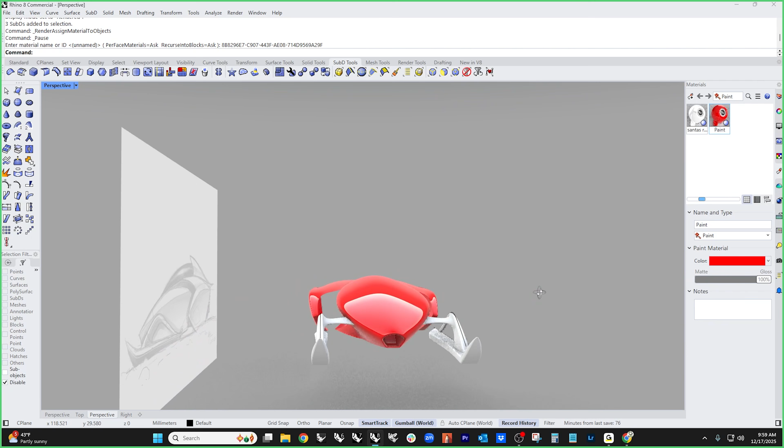All right, let's mirror this over and see what it looks like - just the overall stance. Let's throw it in rendered mode and see what it looks like. We're getting there. I don't hate those in white either. Let's just do that - let's make these white.

All right, so we need to add some volume to these guys, so let's do that quickly. The easiest way to do that - I'm going to isolate and go to shaded view - is just to start stitching things up. So I've got two faces right here. I can bridge those, and I need 1, 2, 3 segments in between.

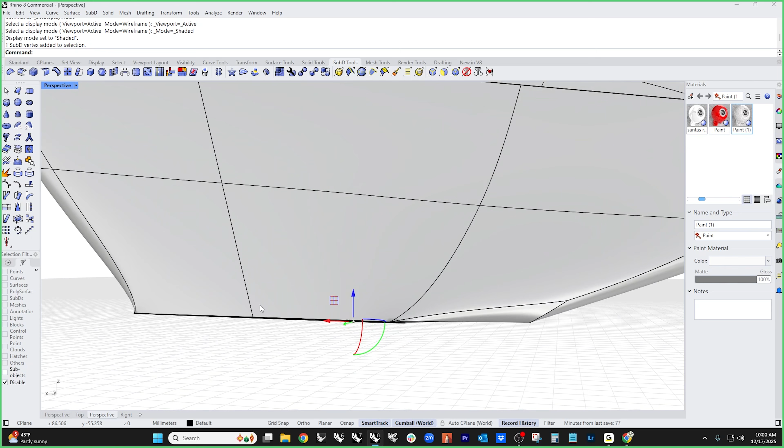So let's bridge those, and I need some segments in between so that I can stitch this edge and that edge. Did I do that right? Maybe. That edge, that edge - so that closes that up.

And then for this, I can do something fun like start dragging, tap Alt, and make copies of those faces. That way I know all of my geometry is going to line up, so I can take these two and bridge - I'm just going to do one segment in between there. And then I can take this and do that, so now that's closed up. So now the only thing I need to do is attach these things in here, so that can go there.

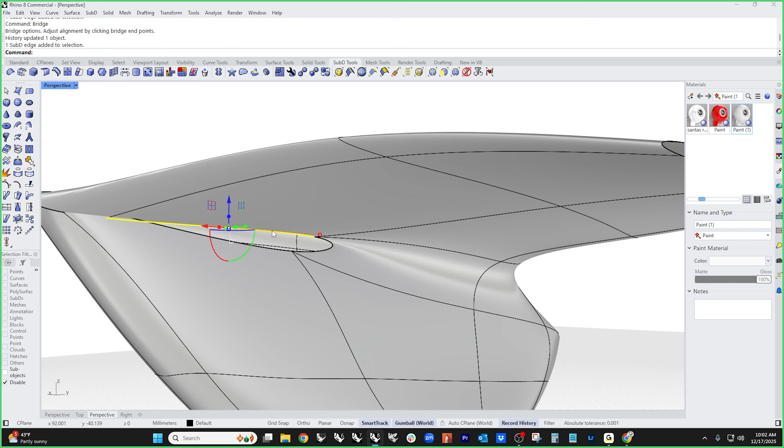And when you're trying to do something like this, oftentimes it's easier to do it a little bit at a time. And so like this, I can bridge from here to here. See how I can kind of sneak up on it? And then you can kind of see what you're left with. And in this case, there's a weird topology thing happening back here that I don't love, so I might just bring that in like that.

Let's see what that looks like. Don't love that, so let's see what happens if we get rid of that. That's better. It's kind of a happy accident. I actually don't hate that. I think that's kind of cool, actually. So let's leave that. I like that little secondary swoop in there that just happened.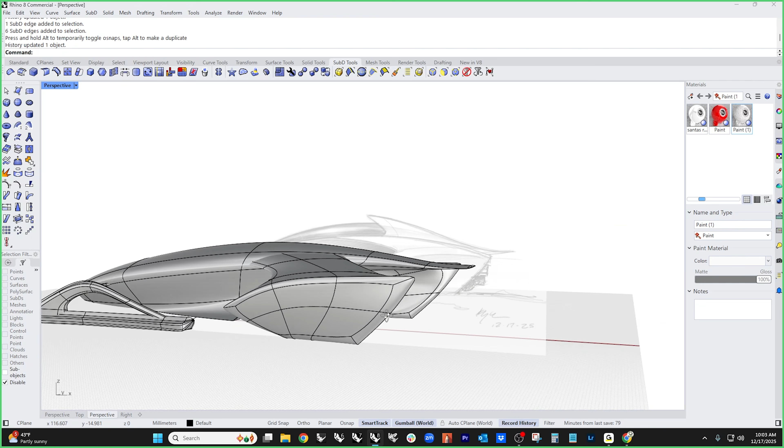Says he likes it and then immediately changes it. It's like my wife. She said she liked me and then immediately wanted to change it.

All right, let's bring this in like that. All right, so now we've got everything closed, right? So this is closed, this is closed. Well, it's not closed, but it's overlapping. So the last thing we need to do is kind of add our cowl back here.

And I think we might be able to actually do this by stealing geometry from here by just grabbing those faces and extruding them. But it makes it a little bit difficult to try and get it to do what you want. So let's

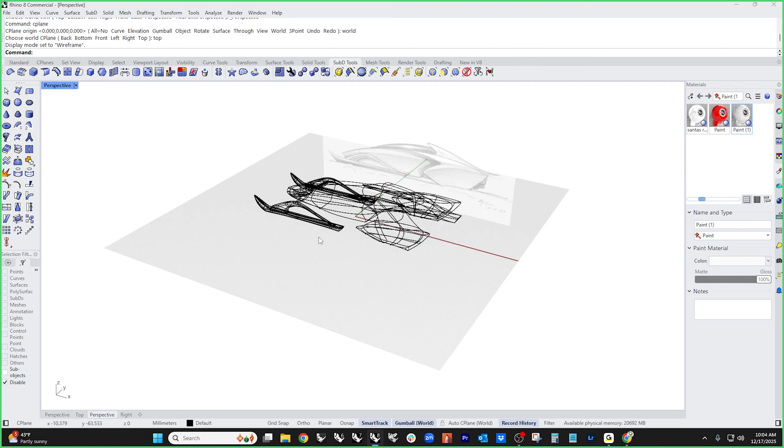and now my ability to rotate has gone away. Well, that's fun. Oh my God. Rhino's just taking a little nap. There we go.

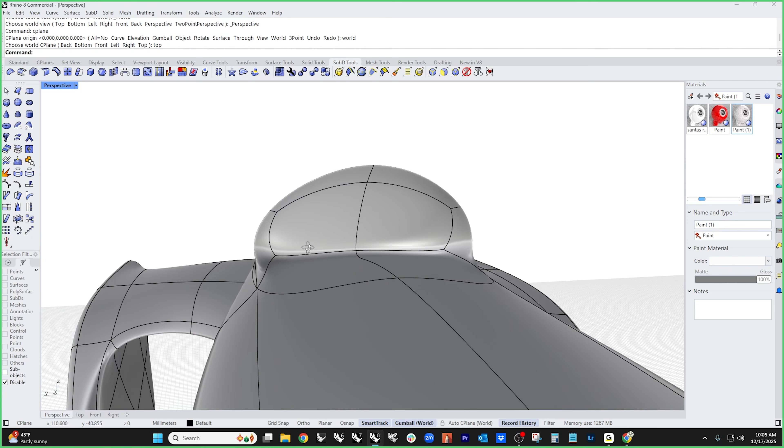I've seen that happen probably in the 30 years that I've been doing Rhino, about 4 times. The fix is to just do the 4-view command and then let Rhino kind of reshuffle the camera. I would love to have an explanation for why it does that, but like I said, that's probably the 4th time I've seen that in 30 years. It's a very strange phenomenon that you all got to see live, which is always fun.

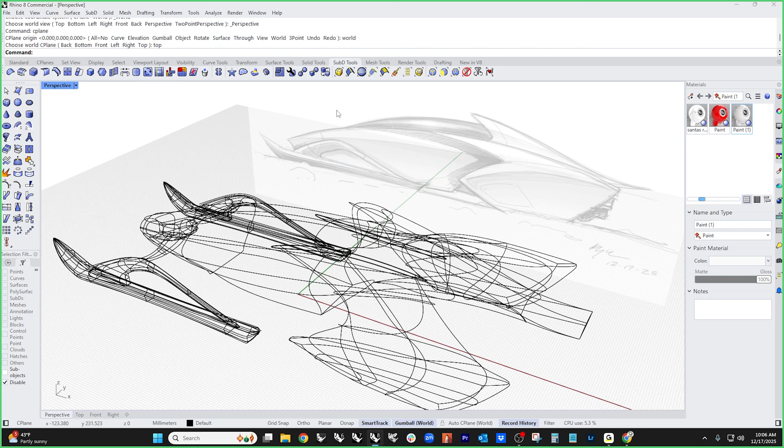All right, so we're going to pull all of this stuff. Let's grab these faces and extrude them in again. And then we're just going to scale down, and we're going to tuck this down like that. And then this ring, let's scale that in a little bit just to give that a little bit more thickness. And then we can adjust to match our sketch. And that actually is kind of coming together pretty nicely. I buy that. What do you think?

Let's see what kind of reflections we're getting here. That's fun. All right, so I missed the sketch a little bit, but for the last detail, which is this cabin in here, I am actually going to just do that with a completely separate piece of geometry. And I'm just going to do that with a sphere. I want a quad ball sphere. Let's see. 4. I want 4. And the style is going to be quad ball.

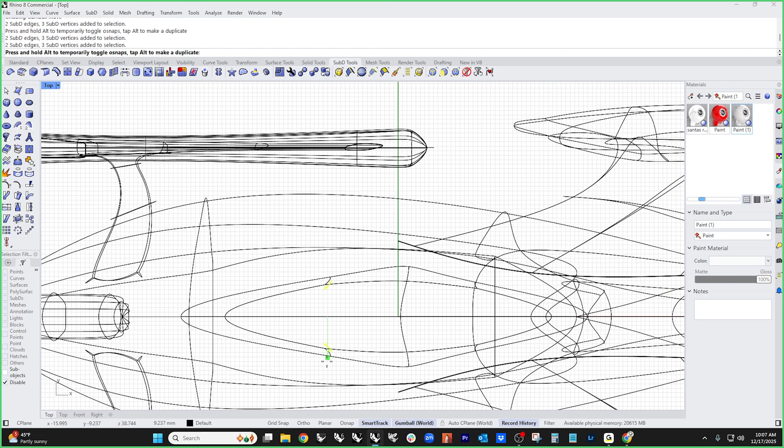And we're going to stick it right there. And from the top view, I'm just going to grab this and stretch it forward. I'm going to stretch this back. And then these I can pull out. And then we can just start smashing this until it gets to be the shape that we want.

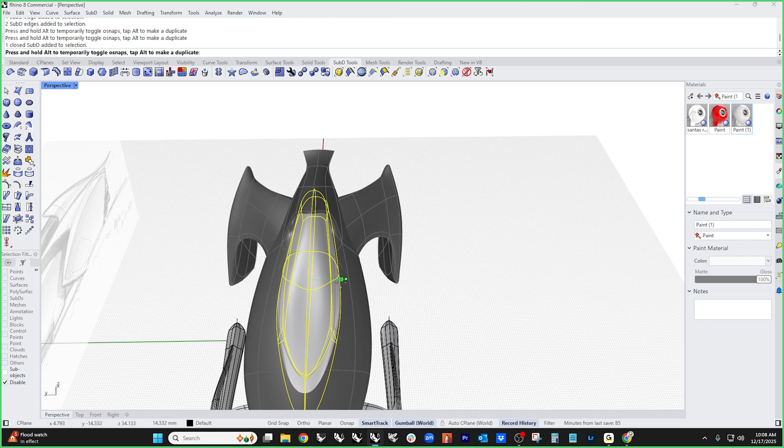I'm going to lock all of this. And this is gross. I will absolutely admit that this is kind of filthy, disgusting modeling. But I'm okay with it because it's going to get us what we want. Just scaling and changing stuff until it makes the shapes that you want it to make. Let's see how we're doing on our sketch.

All right, hour 8 minutes so far. I'd say that's all right for the complication of the thing that I so foolishly decided to try and pull off live in an hour. I'll never learn. But Kyle, they said, why don't you do simpler things? But people, I said, where's the fun in that?

Let's add the quad ball topology. I'm losing a little bit of definition right here. So let's add that point, which gives me that ability, which is what I was missing.

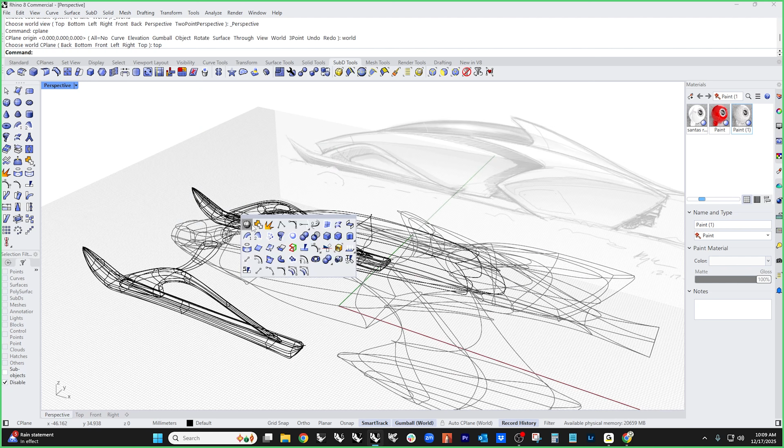And it doesn't really matter what's happening to the rest of this stuff, the rest of this piece. The only thing that matters is that we're getting the shape that we want. And in this case, I think I want to expand that a little bit. And then let's get a new material. And I'm going to make this black, even though this should be glass, but just for the sake of visualization, that'll give us what we want.

Okay? So I'm going to call this pretty much done. Now, if I was going to continue with this, if we had another hour, I would go through and probably, I've got a clip art file full of model parts, and I would jam a big jet engine and all sorts of other stuff in here. But generally speaking, for the time that we have here, I'm going to call this good in order to keep this from turning into something that goes on for hours and hours.

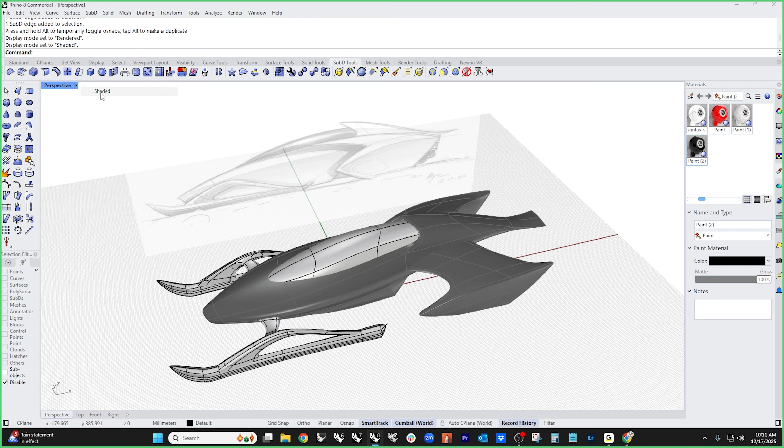But what I am going to do, because right now, as it sits, if we had to throw this through a printer, this actually is open, right? So if I say SelOpenSubD, a lot of stuff lights up. The main body doesn't, some other stuff doesn't. The key with this is to make sure the stuff that's open is tucked inside something else, because then we can grab this entire part and we can Shrinkwrap it and we can preview it and we can hide the input objects, and then we don't want to fill holes.

And then what we need to do is start messing with our target length here. I like to go down by half. So let's go down by half, and let's not draw the mesh wires. Still pretty crunchy, so let's go down by half again. Not 0.75, just 7.5. Starting to clean up. That's probably pretty close. Maybe let's go down just a hair more.

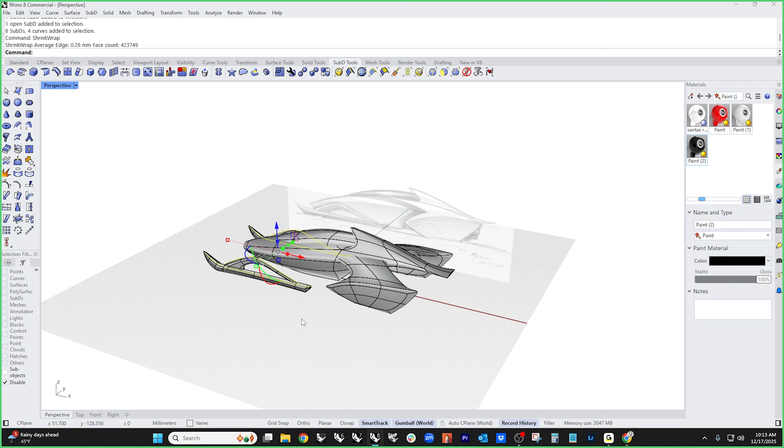So now what this gives me is a mesh that if I render this, you can see this is a closed mesh. I can throw that to any printer on the planet and it'll print just fine. The other thing about Shrinkwrap is if we needed to get crazy, we could shell this part. We could combine these two and then shell that part. We could make these separate pieces. On and on, depending on how you wanted to do it.

But if the goal was some doofus comes into my office at 3:45 on a Friday and says they need parts to go through the printer before 5, this is how I'm going. I ship it. I come in Sunday at midnight, pull it off the printer, walk into the spray booth, spray it, toss it on his desk. Probably put glitter in his phone for making me work the weekends. All right, so this is good. We're out of here.

So that gives us something that we can actually throw through a printer and have a part in our hand. Any questions on that so far? Any questions on anything that we've seen?